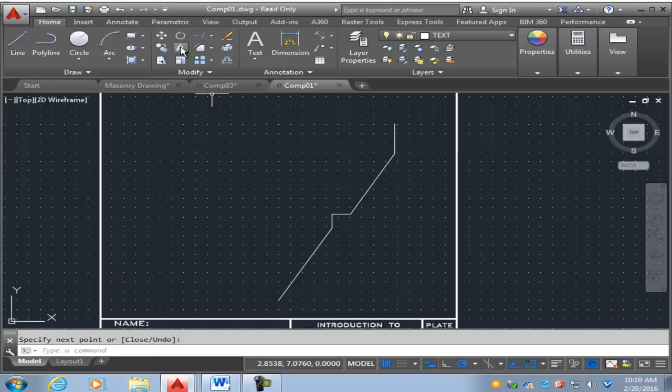Now from here, I'm going to use my mirror command. So I'm going to go to mirror. I'm going to select the first 4 lines of the drawing. I'm going to press enter.

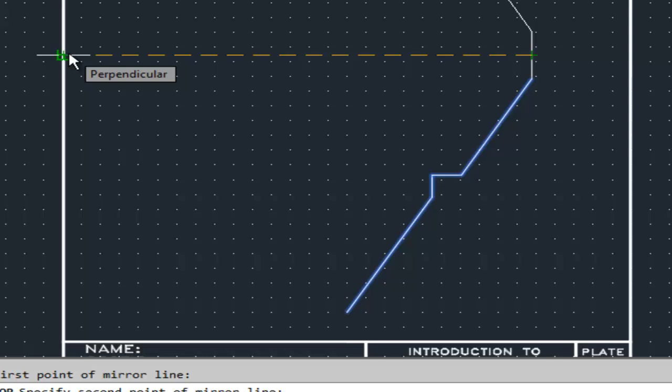I'm going to choose the midpoint of the last line that we made, this triangle here. I'm going to click it, and I'm going to go to the left all the way to this perpendicular symbol and click again. It's going to ask, do I want to erase? I want to say no, and there's the first half of the shape right there.

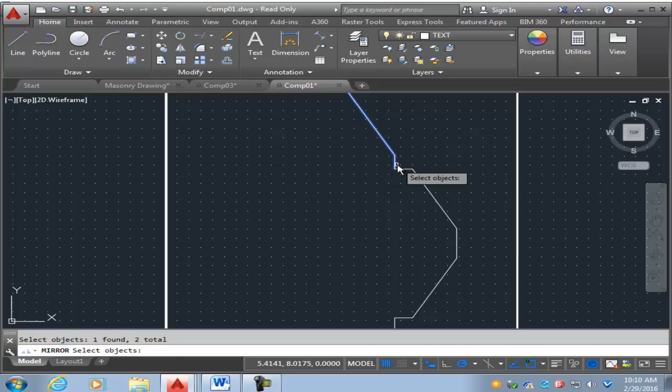Next, again, I'm going to do another mirror. This time I'm going to select the top line, this line, and that one. I'm going to press enter.

I'm going to choose the top corner, and I'm going to come straight down to the bottom. It's going to ask, do I want to erase? I'm going to say no.

At this time, I'm going to use my rectangle command under the draw panel. Starting at this corner, I'm going to come with a rectangle to that corner.

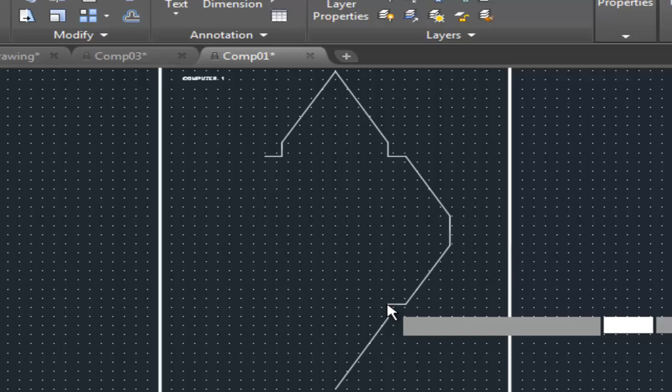Next, I'm going to use the mirror command. Click on the original line, the first one, and the second, and the third. I'm going to press enter. And I'm going to choose the bottom point, and I'm going to go straight up to the midpoint and click. It's going to ask, do I want to erase?

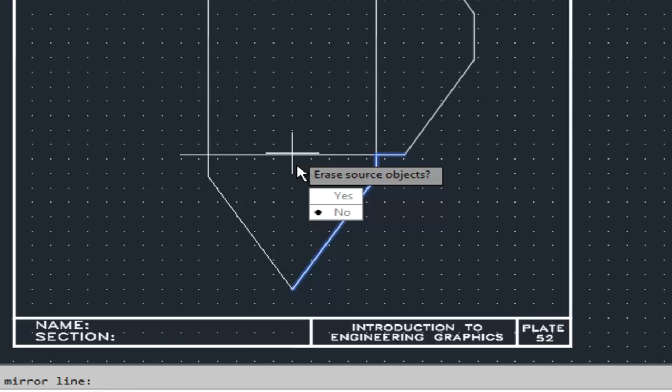No. Lastly, I'm going to come with my line command. I'm going to go at a 60 degree angle, which is actually 120, and type the distance of 2.31. Enter. I'm going to press enter again.

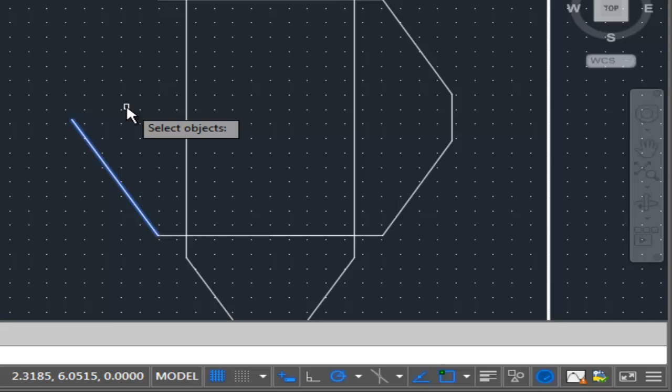I'm going to use the mirror command. Click on the inclined line. I'm going to press enter. I'm going to choose the midpoint here. And I'm going to go all the way across to this intersection mark. It's going to ask, do I want to erase? I'm going to say no.

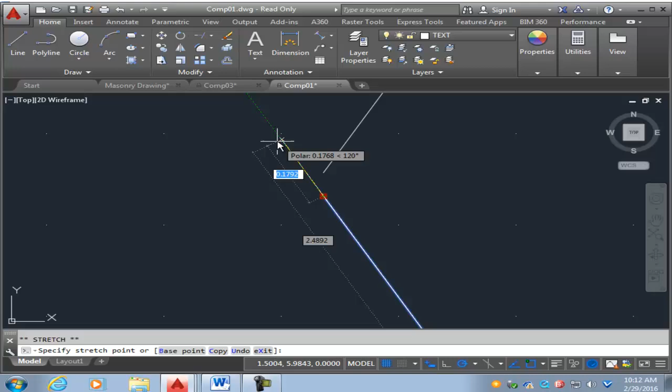And again, notice I have a gap. What I want to do is extend this line by just selecting it first. Choose the blue grip, and I'm going to stretch it just a little bit further past the line. Then next, I'm going to use my extension button. So I'm going to go to extend. I'm going to click on the line that I want to extend to, and as you can see, it connected.

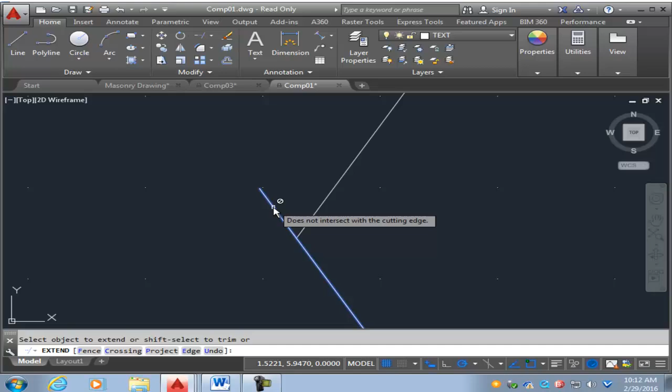Next, I'm going to use the shift, so I'm going to hold shift... sorry, I'm going to have to go back. This time I'm going to just go straight to a trim and hit enter, and trim out the line that I do not want.

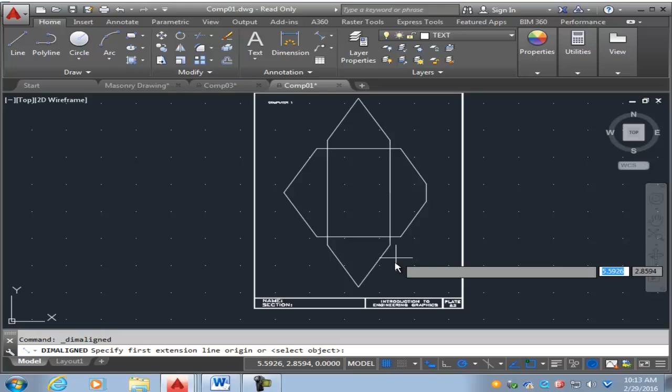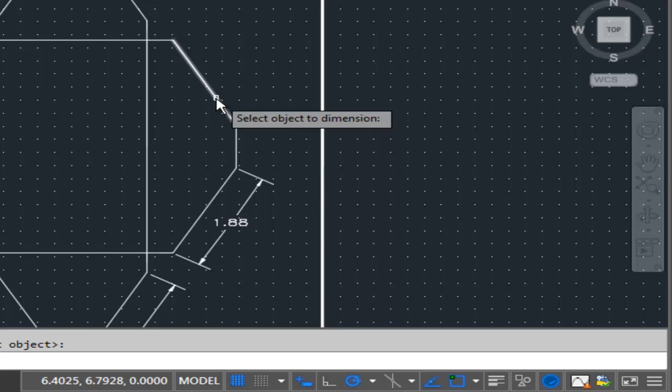Alright, this time it's now to dimension this drawing. So up here in the middle, I'm going to use the annotation section, and I'm going to go to the dimension aligned, press enter, and select the line that I want to dimension, which is this one. I'm going to press enter again, select the line and dimension, press enter again, and dimension, press enter a second time to create the dimension.

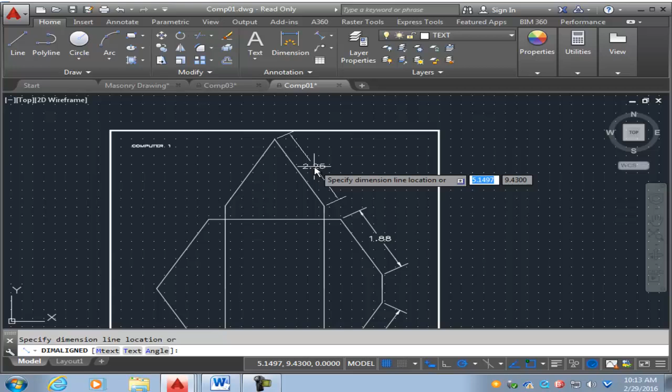Oh, that didn't work. Let's try it again. I'll undo it. Let's go back to my line, press enter. Alright, I have one more over here. So I'm doing 2 enters, so I'm able to click the line, but you can actually click points as well to make it. So next is a dim linear style.

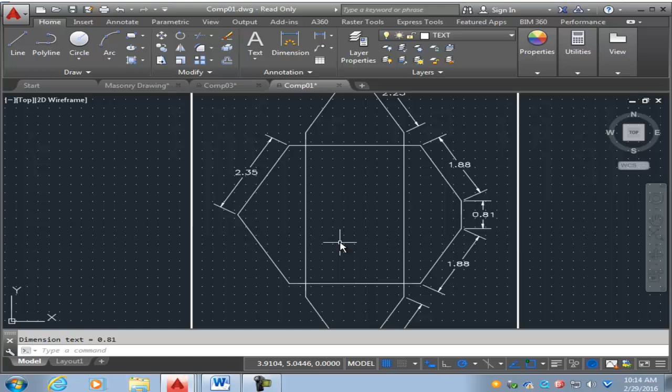So I'm going to choose linear, press enter. I'm going to select this line and come out with a 0.81. I'm going to press enter again to activate the command, press enter a second time to create the 0.38 here. Press enter to make the second one.

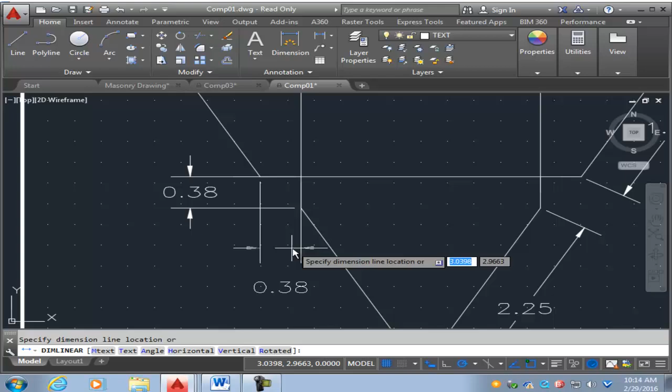Now that one could be very tricky depending on where you select, because you've got the dimension line that's above the regular line. So what I did was I chose the bottom part right here where it's a visible gap. Now what I want to do is make that visible gap by clicking this grip and dragging it to that intersection. So now it's separate. Same for this one.

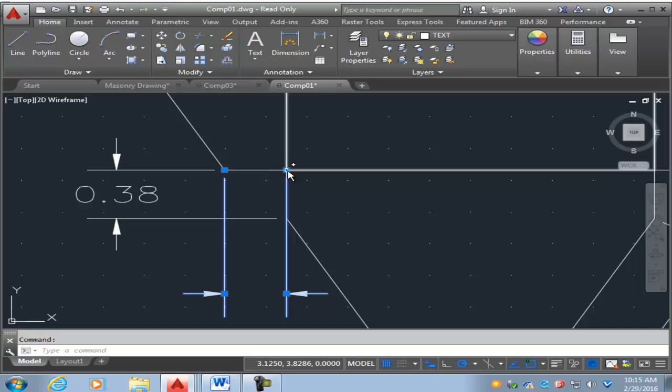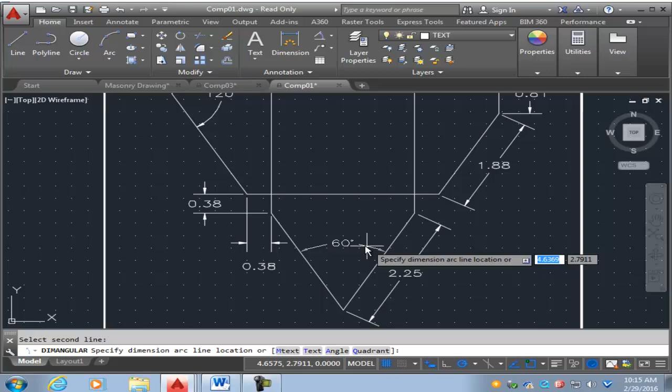Alright, next we're going to do our dim angulars, which is the angular button here, or you can type dim angular. And we're going to click on our 2 lines that form that angle. Press enter. Here to here would be 60. Press enter. From this line to that line creates the 120. Enter. This line to this line makes it 120. Here to here, 60.

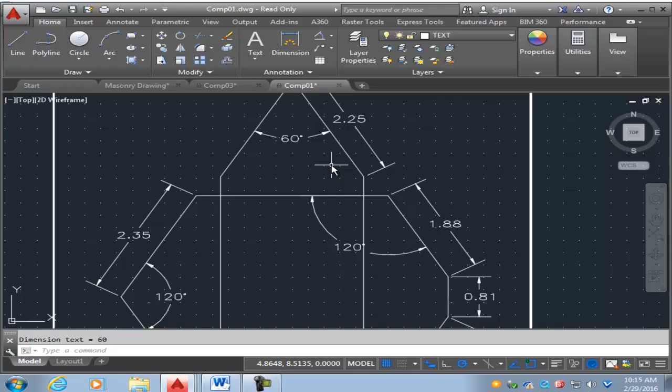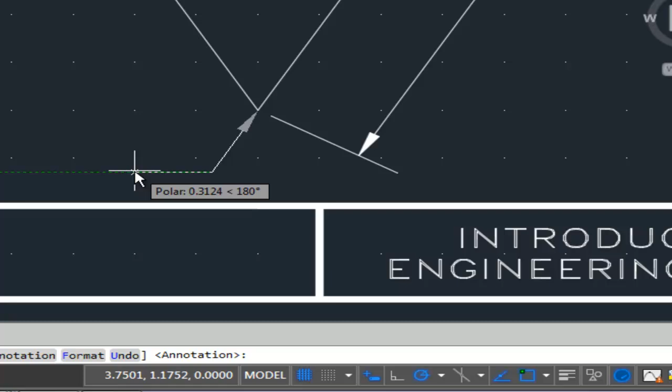Alright, our final annotation will be using the leader command. So you type the word leader. I'm going to click at the bottom, and I'm going to go in at 240 degrees, and I'm going to type 0.375. Come to the left at 0.125. I'm going to press enter for the annotation, and then I'm going to type in all caps 4.25, comma 1.5. Enter, and there we have it.

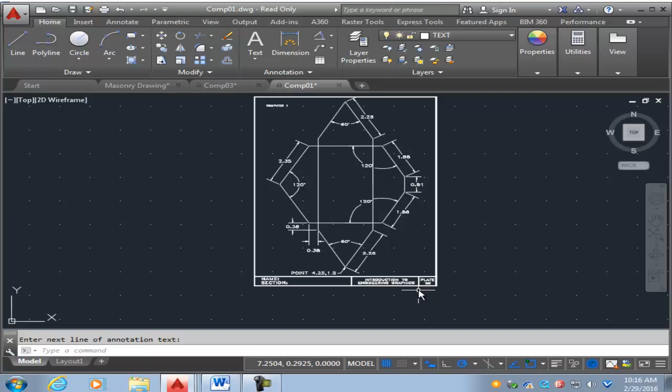This is a complete drawing for plate 52. Now plate 52 does have a part 2 to the assignment, which basically asks what size paper would this document be printed on. So to figure out the distances, I'm going to go to utilities and go to measure.

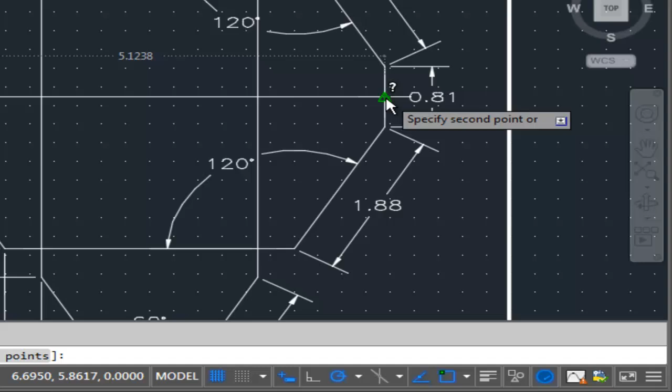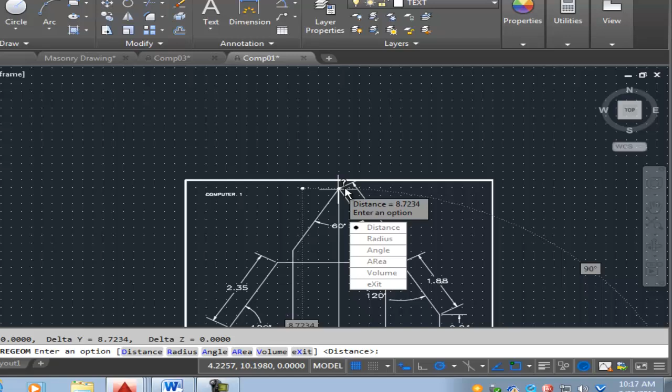We'll click on measure, and I'm going to go from one side of the envelope to the other, and it comes with a distance of 5.1238. Alright, and then from there I'm going to go back to my measure command and go from the top point, and I get a total of 8.7234.

So now when it comes to the second answer of this particular drawing, and this is the part you don't have to do, but the total height again was 8.7234, and the total width was 5.1238.

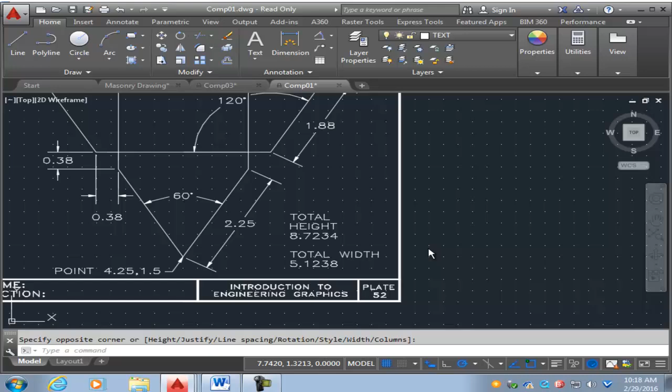So basically, when looking at the sheet sizes, a size A is measured at 8.5 by 11, and this would qualify if the shape was rotated. So an A size sheet would be your answer.